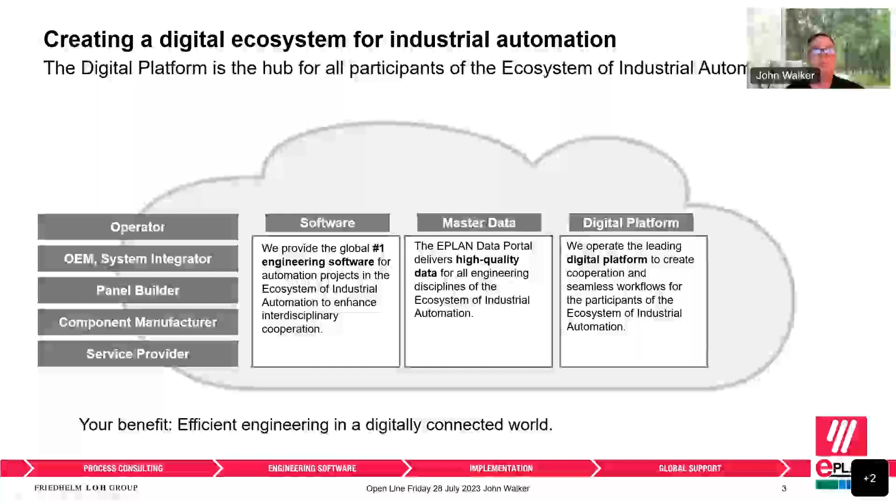I work for the Master Data Group, which oversees the data portal. It's a repository for high quality data for all engineering disciplines of industrial automation—parts and pieces, cables, connectors, all types of data are housed in the data portal. That ties into the digital platform for you to use and create panels.

In the data portal, a supplier or vendor supplies us with basic master data—commercial data, part numbers, dimensions. We ask for a 3D file, we get documentation with a link to the company's documentation for the component, and we also create a macro to use in our P8 product for single line drawings. Users are then able to create a schematic with that.

In ProPanel, they can create a digital twin or 3D representation of the cabinet, then generate a parts list and production data. We'll go into a bit more detail on that in just a second.

So several years ago, two or three years ago—Ian will have to correct me, it was before my time—I think about 2 or 3 years ago, we came up with the EPLAN Data Standard.

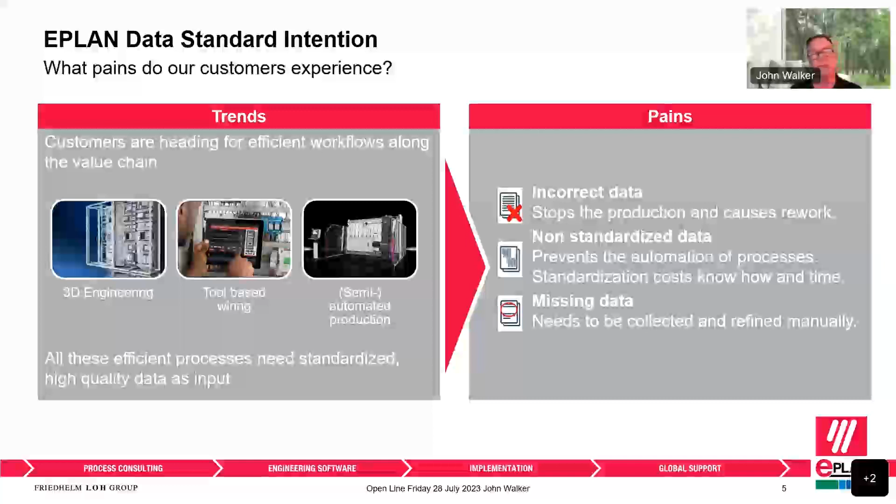There were varying degrees of data or levels of data available on the portal. With the data standard, we tried to standardize things to have 3D engineering tool-based wiring, so you could use Smart Wiring, which could export to a wire termination machine, and also enable semi-automated production, so you could export your panel design to a machine like Perforex to cut the holes in the panels.

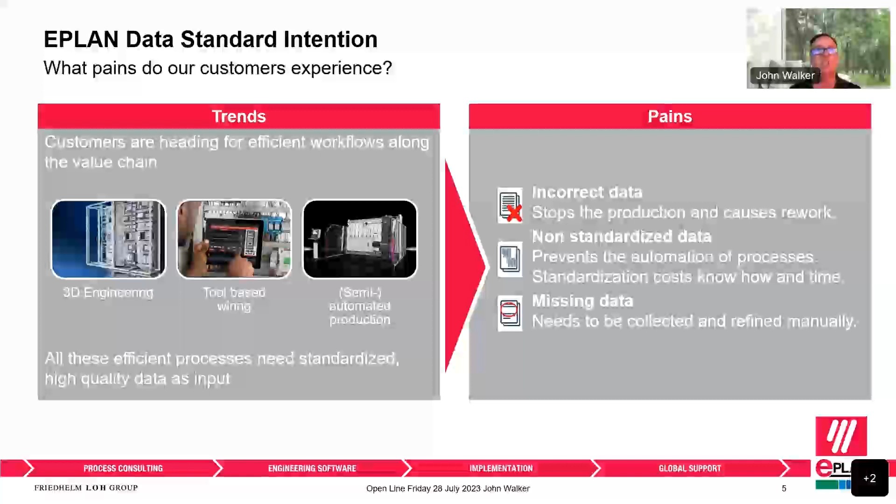Some of the pains our customers were experiencing were incorrect or non-standardized data, and missing data on components that didn't have complete data.

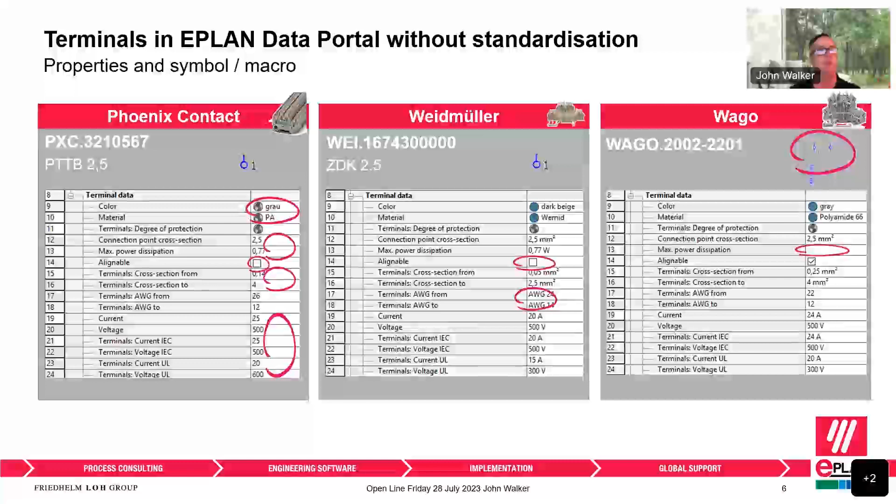Just a couple of examples on some terminals here—Phoenix Contact, Weidmuller, and Wago. There were missing values; for example, the Phoenix Contact, and two of the three actually, were not alignable, so you couldn't snap them in place when building your cabinet. By using the data standard, we went back and got all those missing pieces of data filled in, bringing those parts up to the data standard.

The data standard includes basic master data, functional templates, 3D graphic data, drilling patterns, connection point patterns, and logic macros—it just cleans up the data, I guess is the best way to put it.

Now in the data portal, Josh was talking a minute ago about how much it's grown. There's over 1.4 million components now included in the data portal. Of those components, we've got 870,000 that are EDS compliant parts. The goal is to have all of them EDS compliant. We're working towards that, but having over half, 60% EDS compliant, is a big help because you don't have to go search for data and try to make corrections.

So what does that mean? What is EDS? You say it's EDS compliant, tell me what that means. Ian, you want to help me out on that one? EPLAN Data Standard... try again, EPLAN Data Portal Standard.

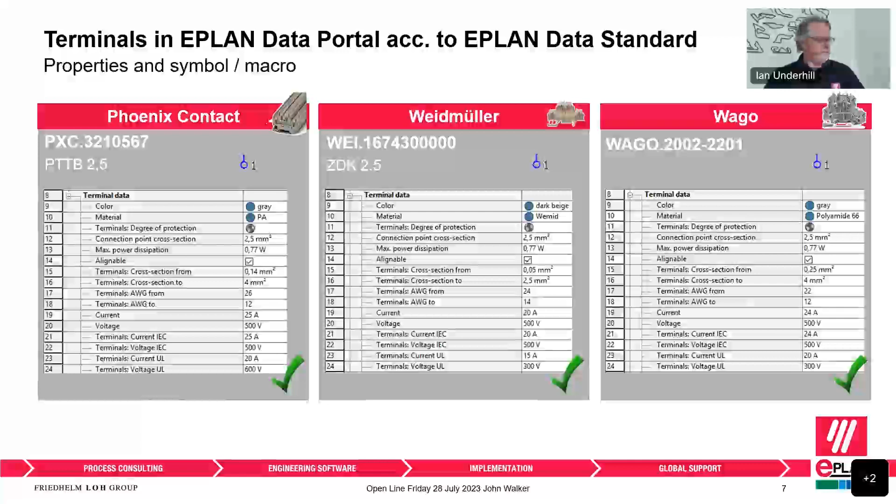Our users will know that for every component there are hundreds and hundreds of properties that could be associated with that component. Maybe simple ones from an electrical point of view might be its voltage - what voltage does it work on, what current does it have. For a terminal, there's specific data like this. Now, if you've got a power supply, these values don't apply. There's a different set. So the data portal standard is separated by the types of components, and for a particular type, like a terminal, we demand that as a minimum this data is complete.

So that would be obvious ones for all components - the description, for example, the manufacturer, the part number, and what have you. But for terminals, there'd be specific information that relates to being a terminal - is it an alignable accessory, for example. If it's a relay, then maybe the coil voltage is a demanded standard. So this standard looks at making sure that the appropriate data for the part is included. That's a concise enough description.

Does that help, Josh? Yeah, absolutely. There's a lot of times we start talking about abbreviations for things and we don't exactly explain what they are, so that's part of what I do. I said it once and then it went straight to EDS. I'm a guy that's in a customer journey, kind of marketing role, so for me, I have to understand what this is before I convey it. I think that's important for us, because we start rolling with things, and then I've been in situations where I'm like, yeah, I understand what that means, and then 5 or 6 months down the road I'm like, I don't think I ever got a definition of what that actually is.

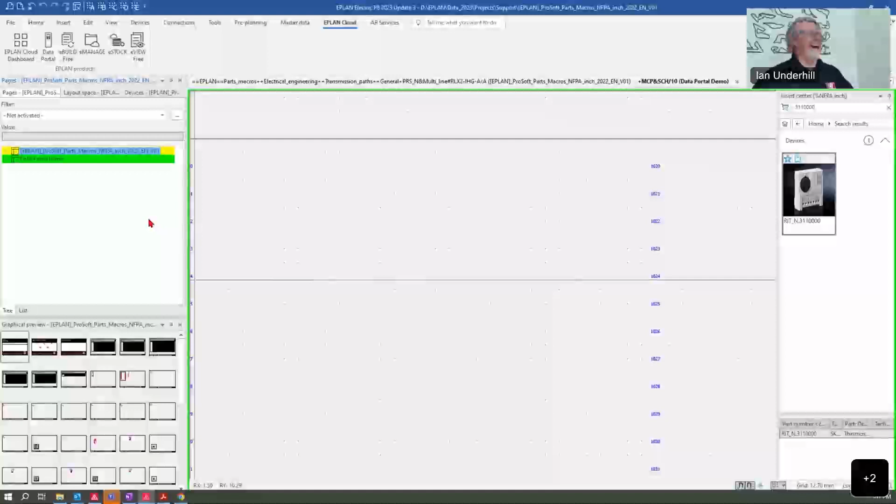Okay, so let's talk about the data portal specifically. From within EPLAN, we access the data portal from the EPLAN cloud menu. This is the default home menu when you start EPLAN. You go to the EPLAN cloud, and the data portal you can see as part of the EPLAN cloud. You can access it by just going straight to the cloud, and it will open the window like a browser window within EPLAN.

You can see you've got access to the various different parts of the EPLAN cloud. The data portal is here specifically. You can also access it directly from the menu by clicking the data portal. Either way, you end up at the same place.

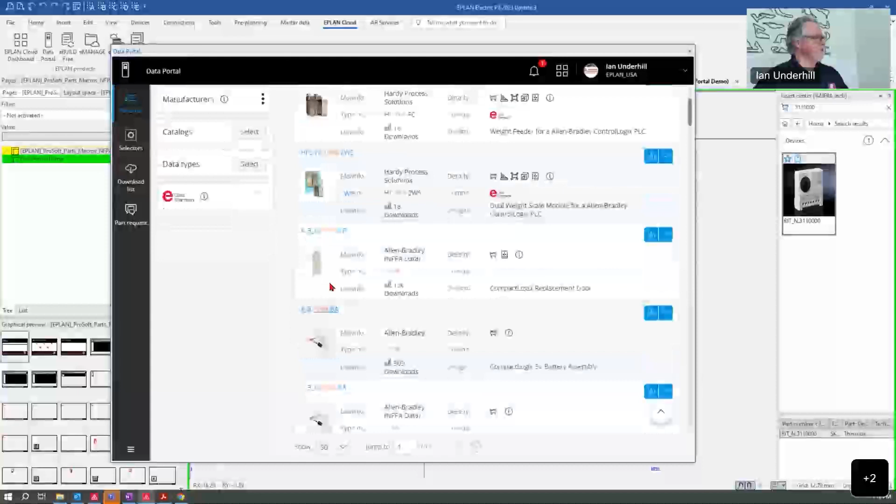The key thing about the data portal is it's a little bit like going shopping on Amazon - you need to have an idea what it is you're looking for, and there are a number of different ways of getting to the data. The most obvious way, if you know the part number, you might just be able to type the part number in. So as an example, 1769 would be Rockwell. You see 1769 is used a lot, but as I scroll down, we can see the Allen Bradley parts, or Rockwell, because 1769 is their CompactLogix, the device type for the CompactLogix. So I can search for a type number like that.

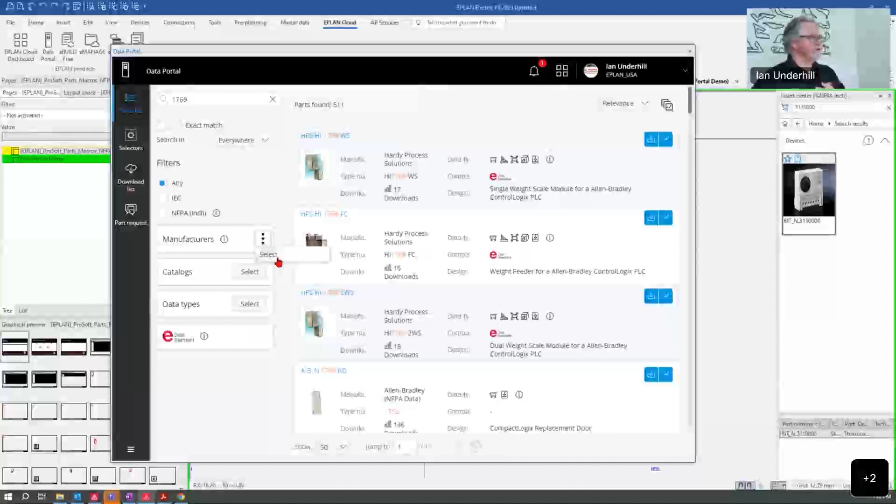I can narrow it down by selecting a particular manufacturer. So given I've searched for the number, here's all the manufacturers out of the list of 400-whatever that have a part with the number 1769 as part of their part number.

We were looking for Allen Bradley information. When you're looking at these manufacturers, you'll see in some cases the manufacturer, as in this case here, Allen Bradley, has got two entries. Typically, although not exclusively, it's going to be the one that has a multicolored icon. So we can see the Rockwell Automation in that red color - this is going to be IEC data, so that's going to be millimeter-based data.

And then we're going to see this other data, and you can see it says Allen Bradley NFPA data. The important thing to remember is that it's not just NFPA data, it's inch-based data. So if you're working with NFPA but in a millimeter environment, this is not what you want to download. You want to stick with the IEC data and then just rotate and flip any macros you have to make them work for you.

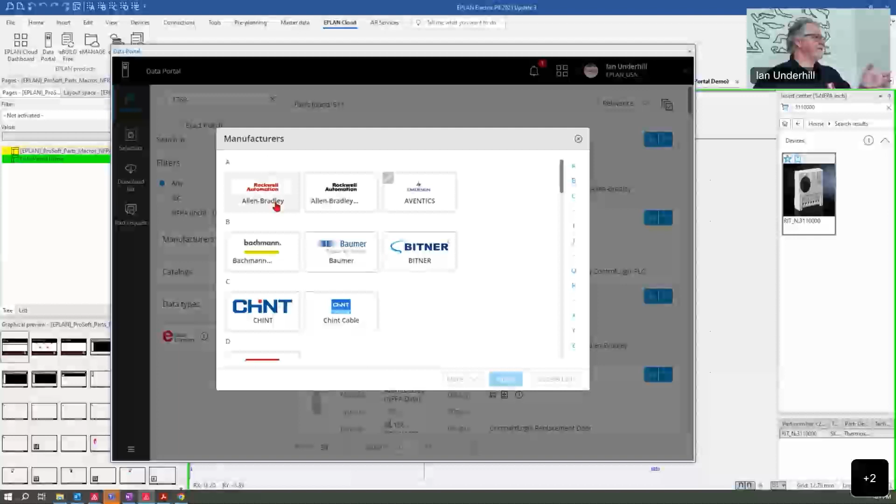This particular project I've got is an inch-based project, so I'm going to select on this and select apply - you can pick multiple out of all these manufacturers that have a part with that value in. So I selected apply, and now it narrows down that list for anything with 1769-dash in the part number and Allen Bradley NFPA data specifically.

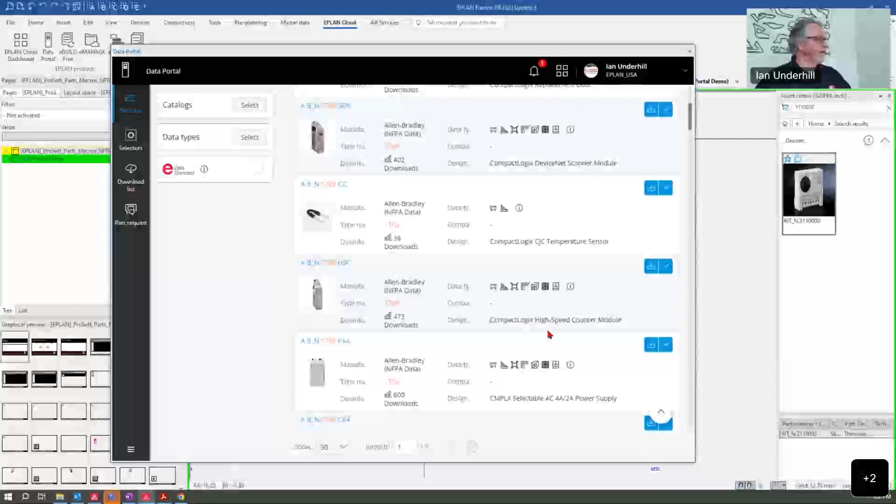So if I have a look at one of the pieces of data, I'm going to pick this card here. I want to pick a high-speed counter - that may be a useful one. So if I select the particular part, we can see here what we would call the commercial data.

So the manufacturer information, the type number, the order number, and a brief description of what it is. Unfortunately, Rockwell in this instance only have the description in English. Many manufacturers will cover all 19 languages.

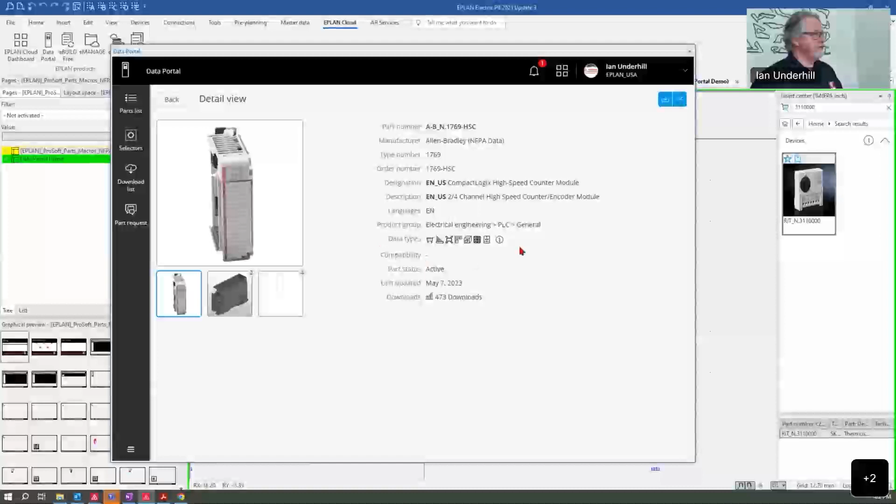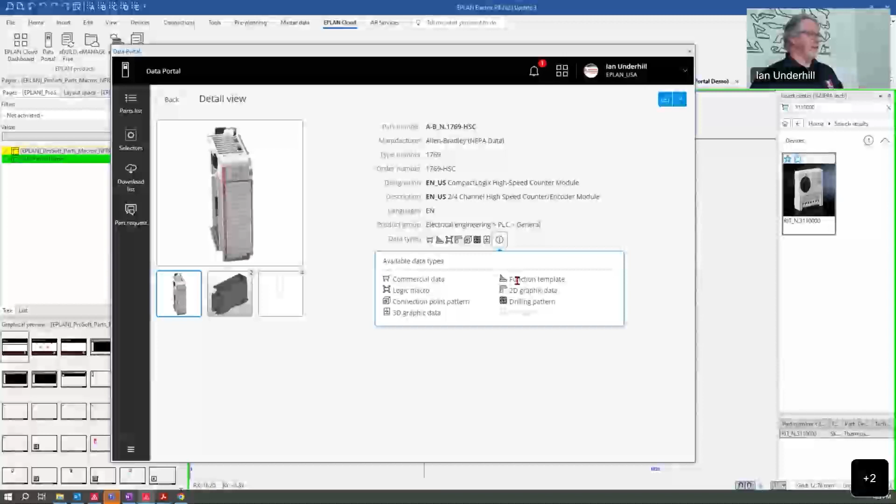We also see the other data types that are available, and if you're not familiar with these icons, if you click on the little information icon at the end, it tells you. So we've got commercial data, we've got a logic macro so we can place it in our schematics, and we have a function template that describes the functionality of the device in terms of what connection points it has - what connection point is the power, the communications, whatever it might be.

We have a 2D graphic, which means if you're still using just Electric P8 and doing 2D style layouts, then you've got data for that. But preferably you're going to be using ProPanel, in which case you have the 3D graphic data here - that's the 3D model. As you can see, this one goes in the backplate layout in ProPanel, and to go with that you have a drilling pattern, so we know how to physically mount it onto the panel and what holes it needs.

So when you pass it to a Perforex, the hole can be cut, or you can do a drilling pattern output, and the technician knows what size holes to drill and where to drill them in your panel. Then there's the connection point pattern, where in three-dimensional space the connections come out of this device, so we can route the wires in ProPanel.

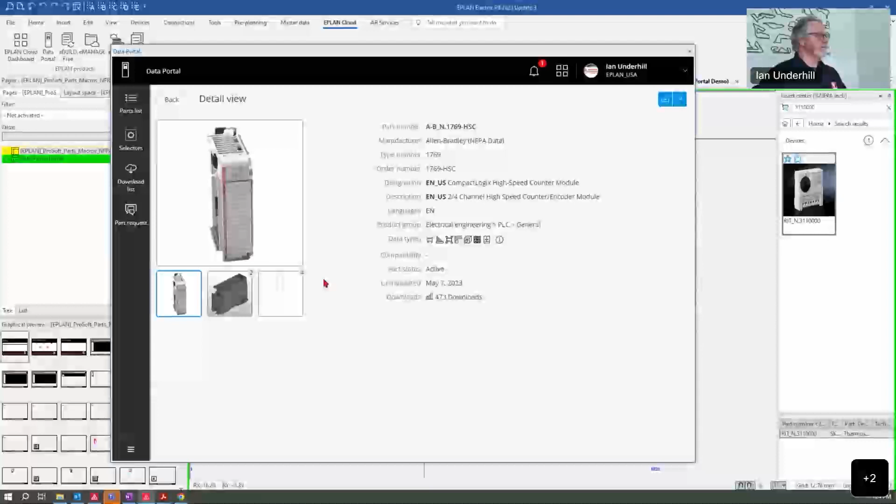So that's what's available with this particular one - how many downloads, stuff like that. If we want to actually look at the macros, we can click on here, and we see in the macro we've got a multi-line variant and an overview.

We've got two different styles of overview. Typically, if you see a variant E, that's the type of graphical overview you'd use when trying to display a PLC rack, for example. If you're doing the import from Architecture Builder from Rockwell, it would place the variant E in your overview page to show your rack layout. Then we've also got the part placement for the 2D, so that's what data is available.

We can choose to download the part directly, or we can add it to a download list. That's why I'd liken it to shopping at Amazon - you can add it to your download list, and it's going to add it into the list here.

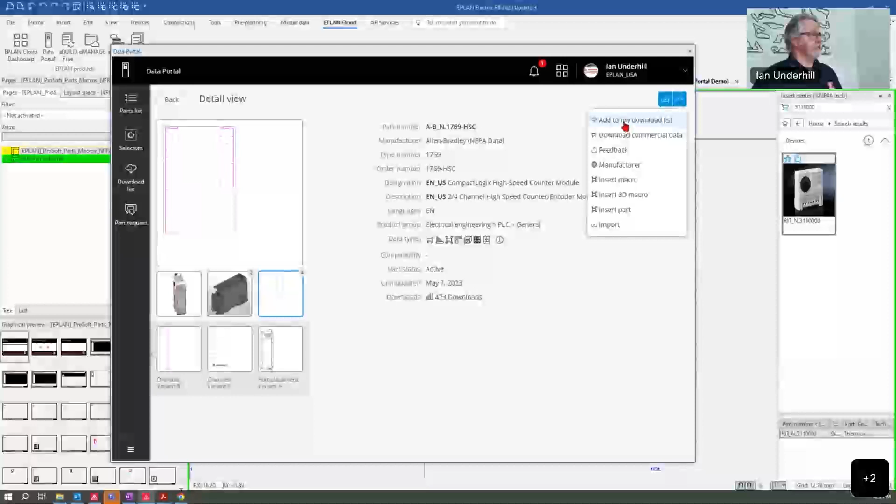So I'm just going to select that, and we see it's added to the download list, and over here the download list now has one item in it. You can continue shopping like that. When you're ready, you can go to your download list - I'll just do this one, select it and import it.

If this was a device such as a contactor or a relay or something where there might be accessories, or even a PLC item where there's a separate terminal block that you need to use with an electronic module, then maybe you might get an accessory list. This item is a standalone, so there's no accessory list.

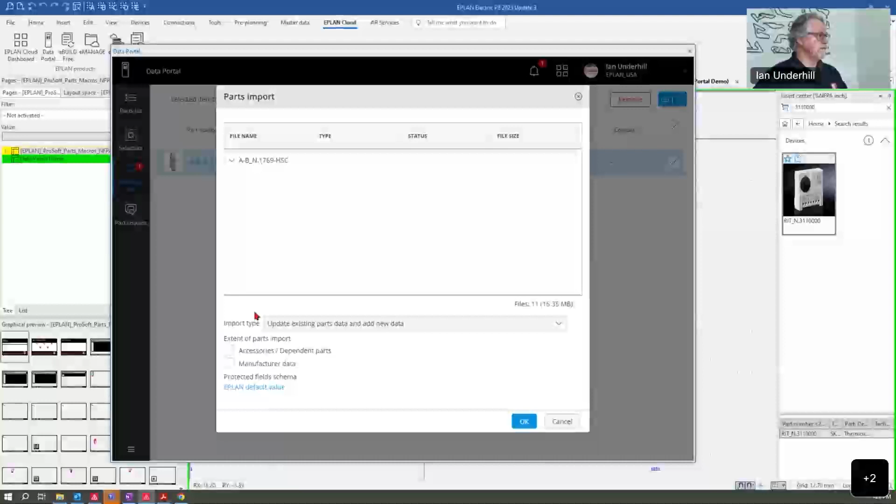You can also download the manufacturer's data - that would be the phone number, address, and information about the manufacturer themselves. I don't need to, I've already got that data, so I'm going to leave those two blank, and I can just select OK.

It does the download, as you can see here, reasonably speedy - obviously that's dependent on your internet connection. Once the files are downloaded, I select import. That last part, having downloaded the files, is adding that part information to my parts database ready for me to use. Once I've downloaded them, I need to empty my shopping cart, so I'm going to remove all the items from my shopping cart.

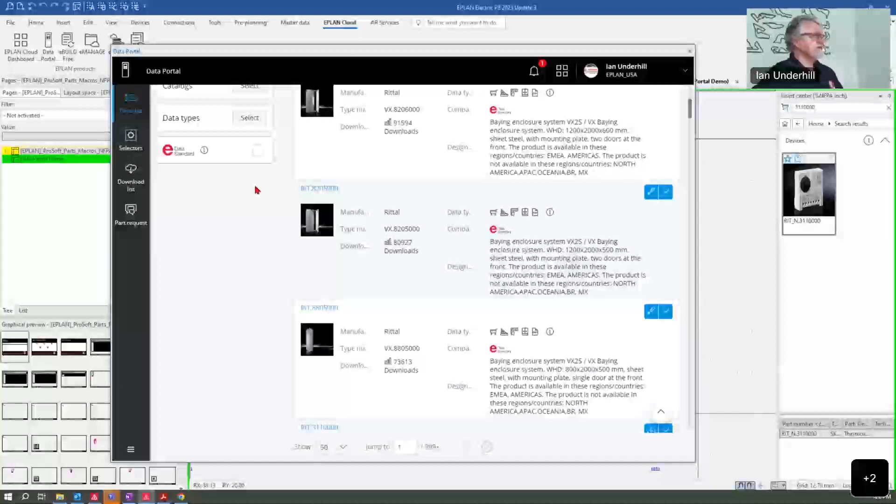So that's one way of looking for data. Let me ask you this real quick, Ian.

So it showed that it had been downloaded 473 times - well, after you just did that, it was 474 times. Why is that download history important? The first thing on your screen right now from Rittal, it looks like it's been downloaded over almost 110,000 times. Why is that important, or is it just to give historical data of the part? I think mainly it's for historical data.

I would argue that perhaps it does tell you if something's not been downloaded very often, it's not used quite so much. Obviously, with the allowance that some of these things are quite regional. Rockwell is a massive player in the North American market, but maybe less so in, say, Germany or China. Actually, China doesn't count, I don't believe, because they have a separate data portal due to the Great Wall of China internet thing. But yeah, it may be related to that. But yes, it's mainly historic data.

So that's one way of... I think John was trying to say something, but he's muted. Sorry, I was muted there.

It does allow us to give feedback to our vendors - here's the most downloaded parts. So they get some information on what region they're downloading. We can't tell them who downloads it, but we can tell them this many were downloaded in the US, this many were downloaded in Europe, different regions such as that. I didn't know that, so that's cool.

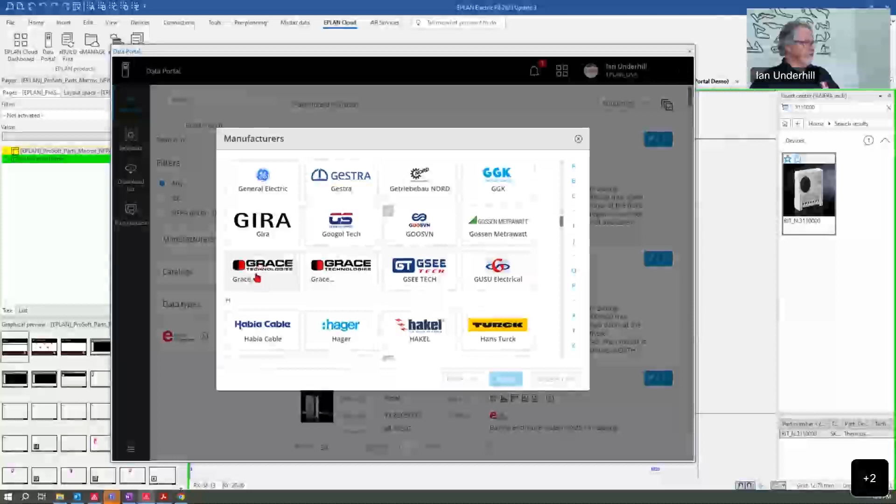So yeah, that's one way of looking for parts. You may want to browse a specific manufacturer to look for parts, and again, I can go and select. Now, because I've got no part number, I'm looking at all the manufacturers available to me, so I can scroll down and you'll see, for example, Grace Technologies - they have both IEC style and NFPA inch data.

And lots and lots of different manufacturers, as you can see. Again, I'll stress that if you're using millimeters, avoid downloading the NFPA data, because that's inches and it's not going to work very well for you. You should download the IEC data and manipulate the macro to make it look as you require. You can filter that too. It looks like that if you exit out of the manufacturers. You can just do IEC or NFPA like that, so that you don't make that mistake.

Yep, that definitely is a big help. I'll jump in here, Ian. You've brought up the IEC versus NFPA data a couple of times. We've had a big push from US customers requesting NFPA data, so we're working with our vendors to get their data, since for years it had just been IEC data. So now we're getting them converted over to NFPA data. We've got an initiative to bring in new NFPA data, and that's something Ian's going to show you on the sample data a little bit later.

Yeah, I keep stressing it, John, and it's important. It's inch data, that's the key. We call it NFPA data because it's in that style, but it's inch data, and it's really important for people that maybe they're using fluids as well. Typically all the fluid equipment is all millimeter based. Generally the rest of the world is millimeter based.

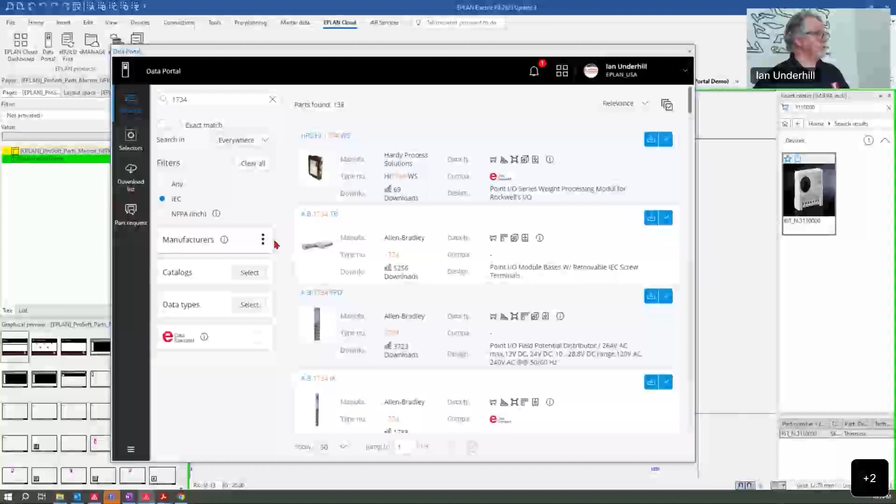Anyway, so yeah, once we pick on a device, as John said, I'll use 1734 as an example. So we've got 1734, we've got a mix. I can pick to have any. I've got all sorts of things I can pick. IEC only should filter out the NFPA ones, and NFPA only should filter out the IEC ones.

Hey Ian, go back to any, if you don't mind, just for a second. How do you know if it meets the EPLAN Data Standard, or EDS as I called it earlier?

Yep, that's a good point, because it has that there. Oh, a fancy logo. Fancy logo, EPLAN Data Standard. As you see, Rockwell haven't caught up yet.

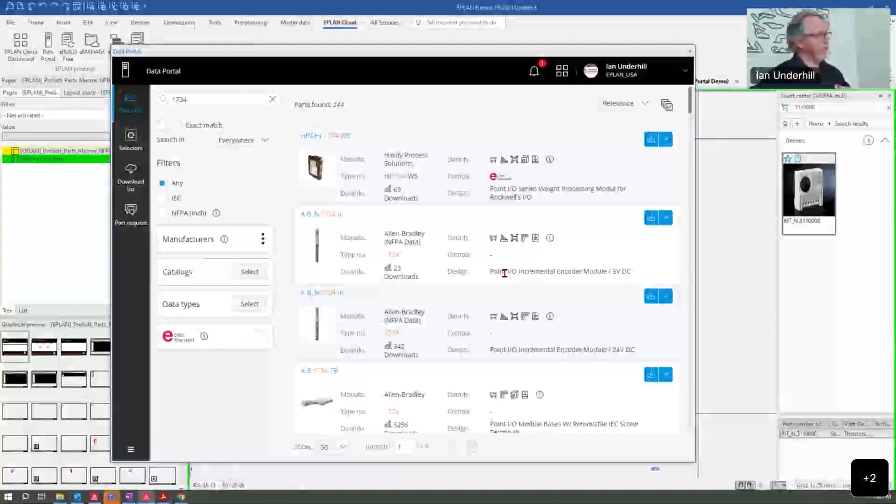Unfortunately, they're not, but they are working on it. I can tell they're working on it. And the fact that it's not there doesn't necessarily mean the data is bad. I wouldn't think of it that way. It's just that it hasn't been tested against the standard. That's correct. Chances are, certainly from a PLC standpoint, the Rockwell macros are very good, and the data is very good, I should say. We're all artists, so we all can criticize the way the macro looks, because we all want it to look our own particular way. But the data is generally very good from that respect.

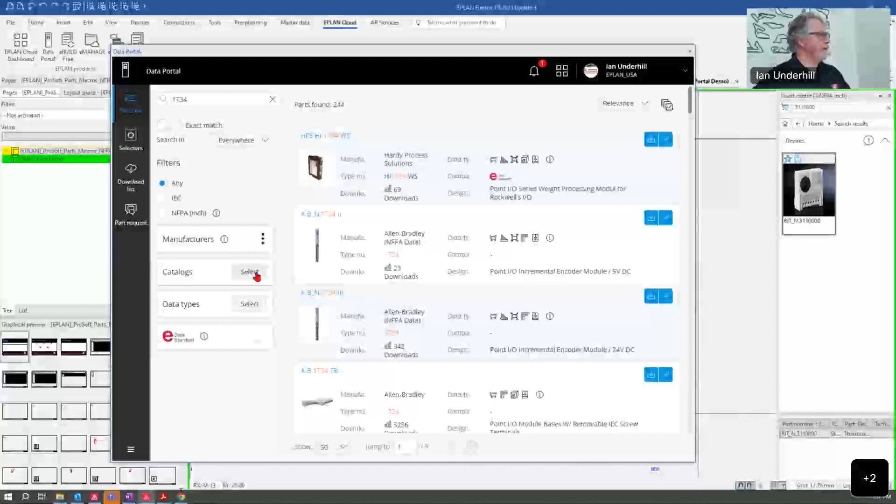So yeah, that's how you can search. Another way would be to actually use their catalogs. So I'm going to get rid of this, looking at everything now. And this is the classification. So we can use the E-class classification. E-class is a standard that originates out of Europe, and it's been adopted by a massive amount of manufacturers. You can use four codes to classify pretty much anything from a push button to an automobile.

This organization has the classifications, and using four different numbered codes, you can use that. If you've got E-class data for a component, and EPLAN supplies the E-class data and a step file, we can create the data portal data just from that data. That's how in-depth that E-class thing is.

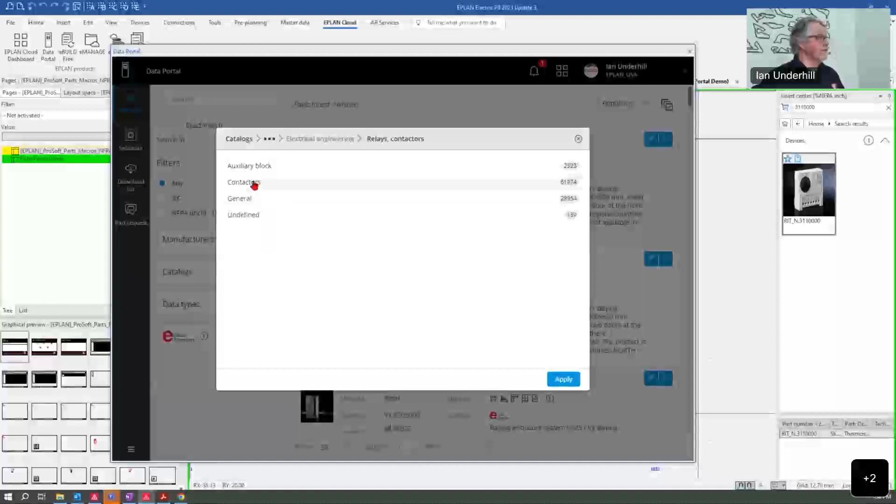I'm going to look at the EPLAN product groups because it's going to be more familiar to most people over here. So we can look at the product groups, and when you're looking in your parts database, you'll recognize the same categories. Electrical engineering - are we looking for heaters, inductors, miscellaneous devices, motors, whatever the devices might be. I'm going to look for relays and contactors as an example. I'm going to look at contactors, across all the manufacturers who make contactors. So there's 62,000. Now I can see them from Siemens, from SE which would be Schneider Electric, and from all sorts of different manufacturers. So I can search through, and there's 999 plus pages to jump through.

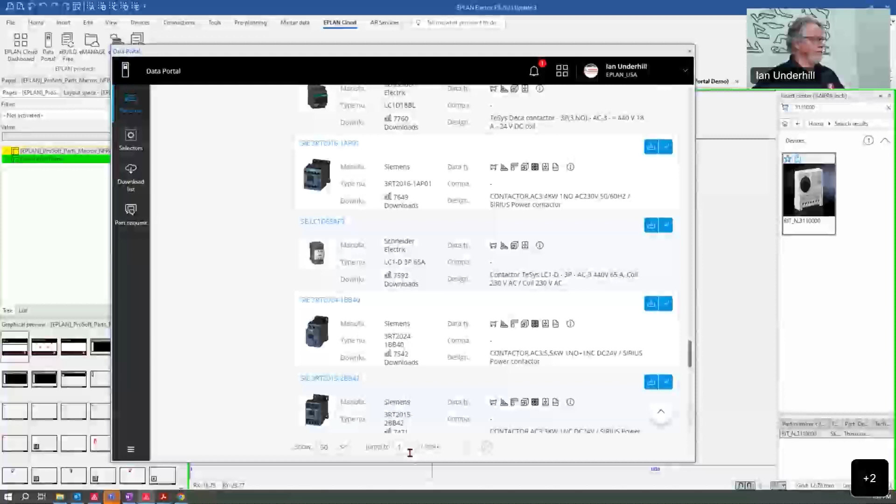So I can then go shopping for contactors on that basis. And then I could also say, well, who does NFPA data for those contactors? So here you see it's not changed because it doesn't matter - it's a contactor, it doesn't come with a macro, it just comes with function information.

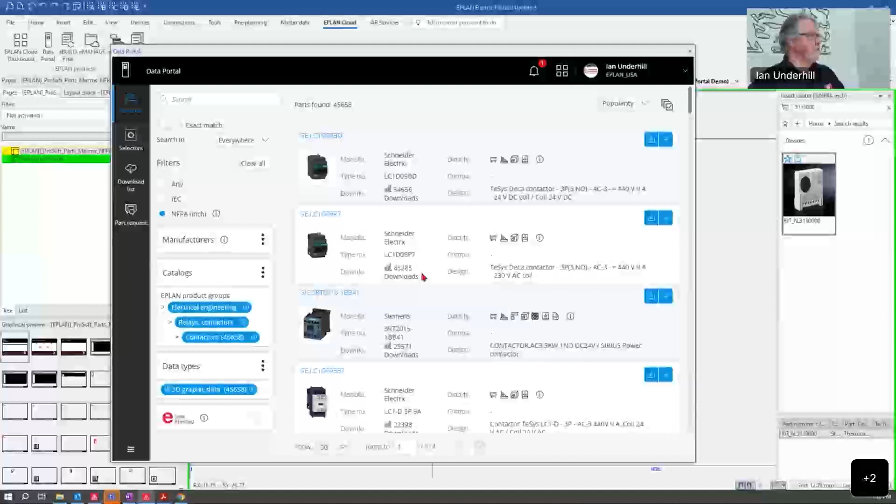And then I can also filter. It's important for me that I have 3D graphic data. So who does that? Using these different filters, using the manufacturers and catalog information, you can help narrow down what you want.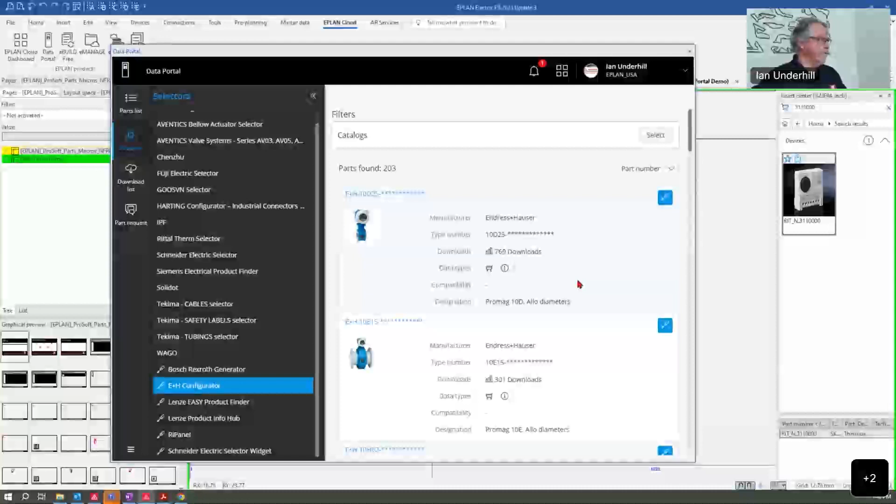Endress+Hauser is a manufacturer of meters, flow devices primarily - measurement units that will measure the flow in a pipe. You can see most of these items clamp onto different styles of pipe.

If you're picking a particular style, there's a basic series, and you can pick if this is the series of device you want. You go to the screwdriver icon, and it tells me we're going to go somewhere else to look at this data.

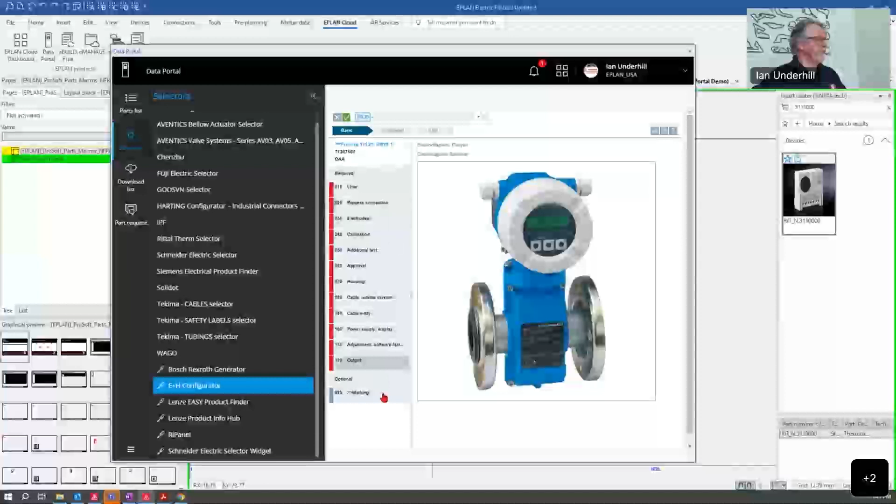And it takes me to the Endress+Hauser configuration page. So there's a big view - this is an electromagnetic flow meter. I then get to fill the part number in by deciding the different properties of this, so the liner of the pipe - it's going to be PTFE - and that gives me the Q code.

Then I go to the process connector - what style of connector is it - and I just randomly pick in there. And that's not something we've built. That's something where we're just connected to the Endress+Hauser configurator on their website.

I believe in many cases it's a collaboration - the link there is joint work between them, because they know their components, and EPLAN provides that link. But this is actually their configurator, it's not ours, yet it interacts with our data to provide the right information.

You can go through the whole thing, and once you've filled out all the different parts, you can download that specific part. So whenever you do it like this, it's not necessarily going to have that EPLAN data portal certification when you're looking at it in the data portal, because you're having to go in here and configure it from there.

I'll be honest, I didn't notice, but you may be right. Let's see - if I click on it. Because if you're having to configure it, there's nothing to really give a certification from, since you're configuring it yourself.

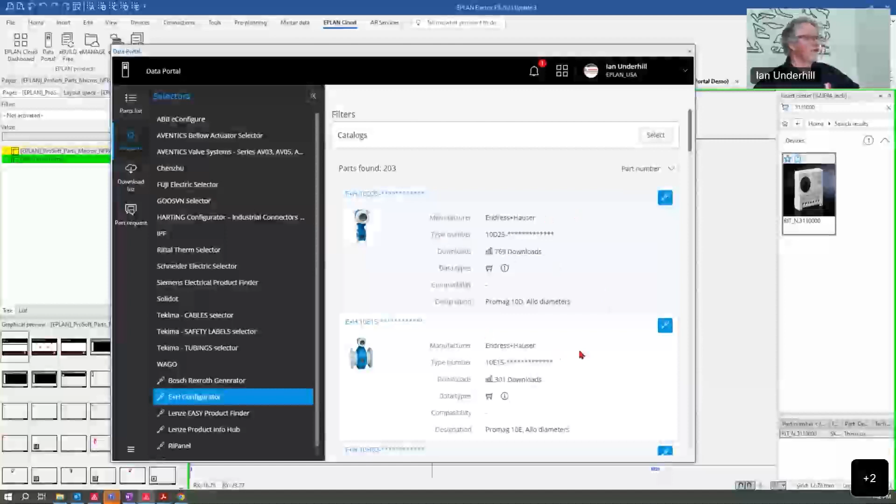Let's go back and just go to those selectors. This isn't the only company that does this either - we have other configurators. That's Schneider Electric, for example, again takes you direct to the Schneider plant.

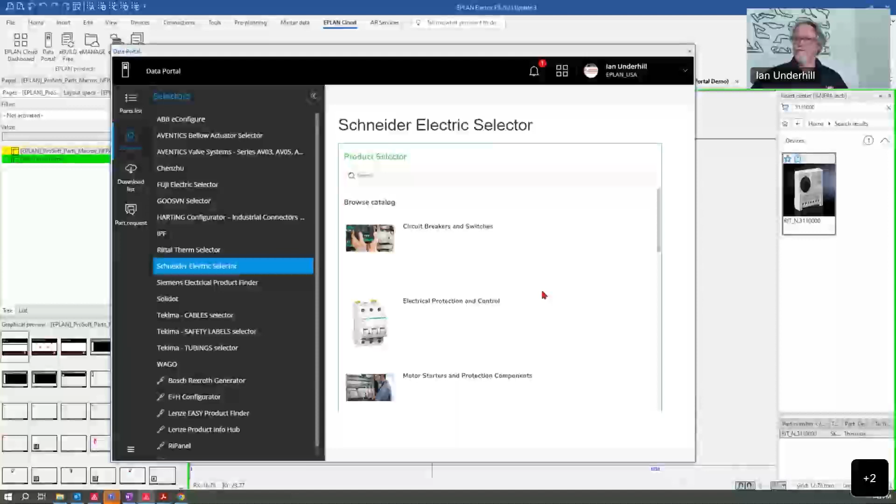One of the companies, Festo for example, you can do it actually direct through their website, and they've got tools - they don't send you a part, they'll send you a whole project based on the configuration of a valve pack. So loads of different tools to configure things. The RiPanel one allows you to pick a panel and actually put cutouts in before you build it.

So I won't carry on with that too much, just so we've got time to get to the other stuff, because we've been talking away way too long. Well, it's great information though. Yeah, oh yeah, it really is.

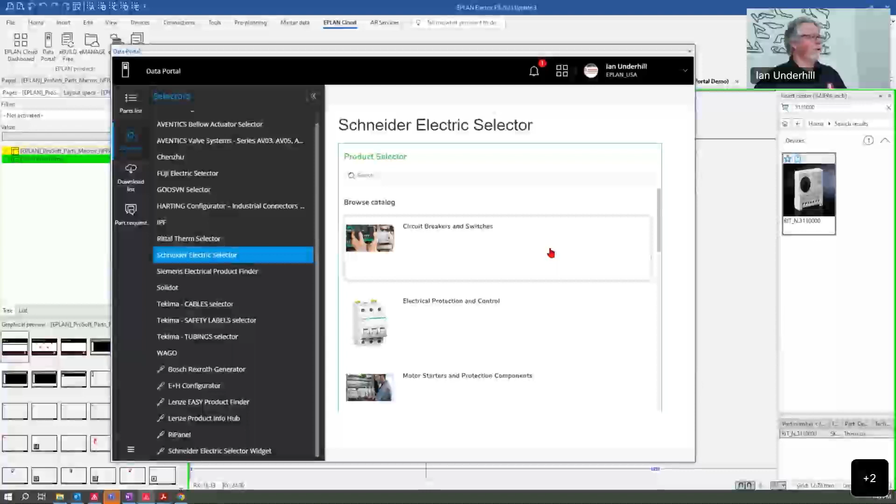For sure. So I want to just show you when you download a part, as an example - I picked a Rittal part to show what that brings you. I downloaded a Rittal part earlier, and this is the part. It's a thermostat that would be inside your cabinet to control a fan or a cooler, or maybe a heater if you've got to keep the cabinet warm rather than cold.

I found it in my insert center, as we see here. It's actually in the actual parts database. I'm going to show you how you might then use it. Once it's in the parts database, it will appear in your insert center.

I actually searched for the part to make it easy to find. I could navigate - let's get rid of that - I can navigate through the devices, and we see those same categories: electrical engineering, component, and then here's the categories. Obviously, since I know what I want to look for, I can search for it directly.

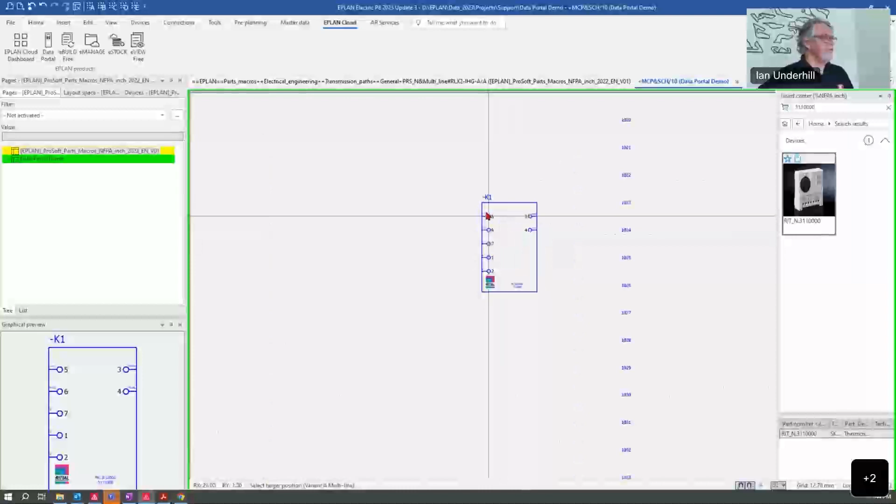This makes it much faster. If I drag the part in, this is an example of the macro that comes with it, showing the connection details. I'm just going to place it.

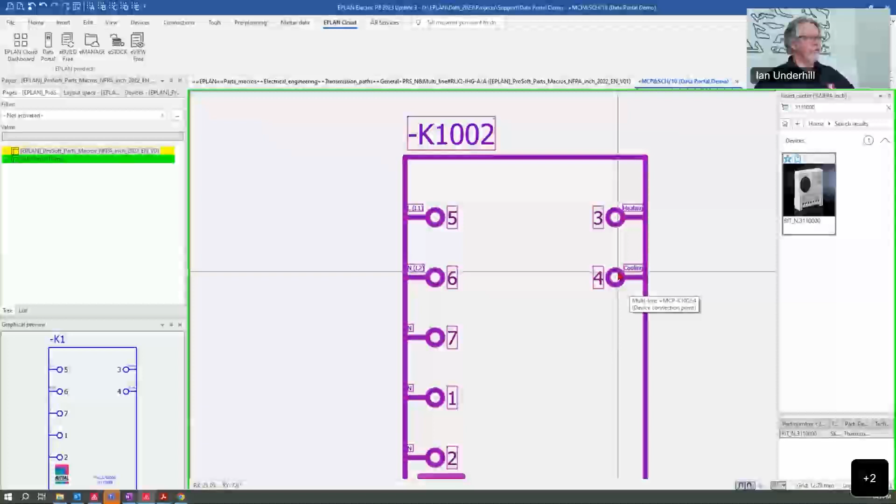So it identifies the connection points, the live and the neutral connection points for this device. These are probably not connected in this case. And is it going to be heating or cooling, depending on how you want it? If the temperature is above the value set on the dial, the cooling will come on. If it's below the amount set, then the heating will come on. So that's how this works.

We talked about the additional files that it comes with, image files and macros and that. So there's an example. When I go to my part, there's the image file, so I've got a picture of what it looks like. But then I've also got data that gets downloaded.

Some companies actually will give you a PDF of a data sheet, or other companies may give you a hyperlink to the data sheet on their website. Rittal is one of those companies that does that. So if I right click here, I can look at the open hyperlink. I see I can open the image file, but I can also look, as you see, Rittal covers looks to be close to 19 languages. I'm not going to count them, but from English, Turkish, Russian, all sorts of different languages you can see here.

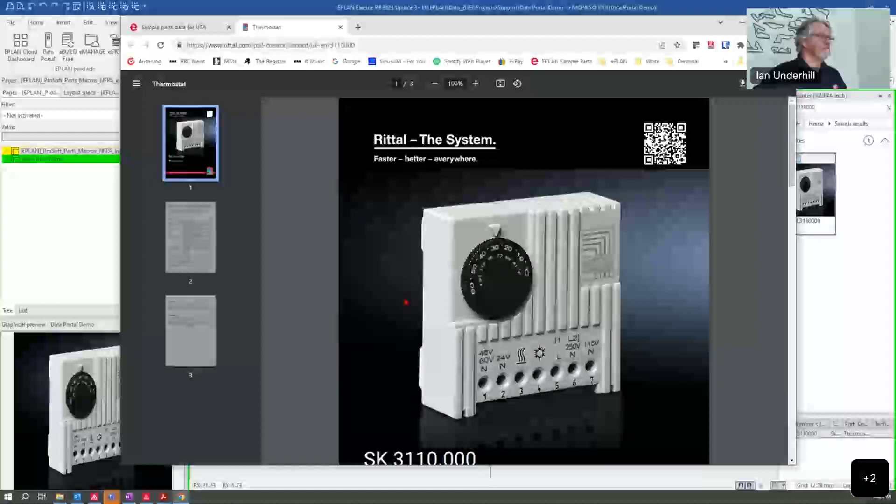I'm going to obviously pick the English one. So I click on the data sheet here. It takes me straight to the Rittal site, and here's the data sheet for that particular device. So that's something you could download if you wanted to give it to your customer, or you can actually, if you do bill of materials, you can include that hyperlink in your bill of materials, so your customer can go and access the cut sheet or the data sheet for that device. So that's the sort of data that's available.

So we talked about standard data from the data portal. John also mentioned that there's been an initiative working primarily, I believe, with some of the distributors that we work with, to give us a list of components they believe their customers use a lot. So they obviously have data about who buys what, and we use that data as a company to generate some inch-based, NFPA-based data, for companies that are not necessarily on the data portal. Companies we are working with are trying to get them interested to come on the data portal, or John is, but companies that are not currently there, but we get a lot of requests through the distributors.

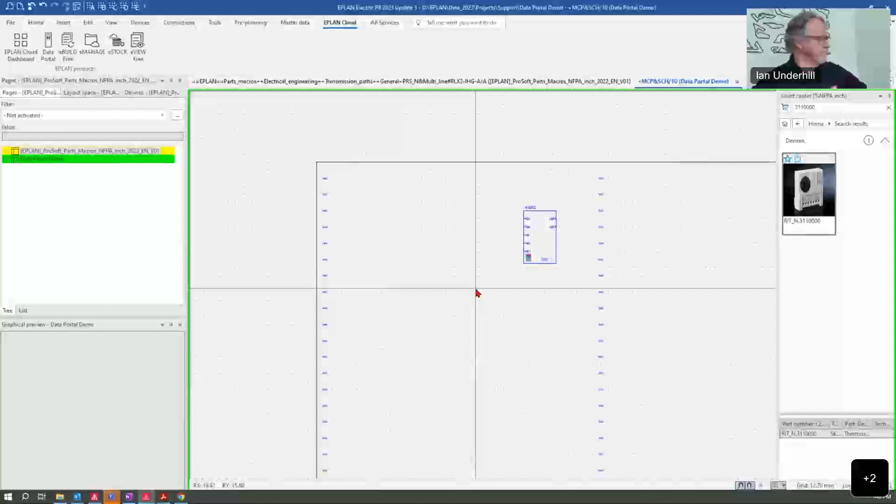And just to add to that, Ian, we are pulling some data from existing vendors that we have in the portal. It's just parts that our distributors are selling that are not currently available, or it's maybe parts that EPLAN customers have told the distributor, hey, we need to get this part. So some of the parts we're creating are with existing vendors.

Okay, so how long does it take to get that part data in, though? From the time of the contact that you have, to the time that it comes into the data portal, and then whenever you check the standards, what's that turnaround time look like? Well, to be honest, it varies at the moment. It's a pilot program at the moment. We've just released the data about 2 weeks ago, the first set of data. We're working through it, so stay tuned. I can give you a better answer maybe in a few months.

The thing that Ian's about to show you is the sample data. And every registered EPLAN user should have received an email from EPLAN a week or so ago, provided that they said we were able to contact them. You can opt out of that when you first sign up. But every user that said we could contact them got an email with a link to this site that Ian's going to show you. And we're really asking for feedback, so if you like it, if you don't like it, let us know both.

These are data points that may not have everything that needs to be in the EPLAN Data Standard yet, but some of them do. This has just been pulled from publicly available information. So our EPLAN team is going in and looking on the company website and pulling data. If they can get a 3D drawing, they've got that. So varying levels of data, but it's exciting to have this start, and it allows us to go back to existing vendors and new, potential vendors, to convince them that there are customers looking for their data.

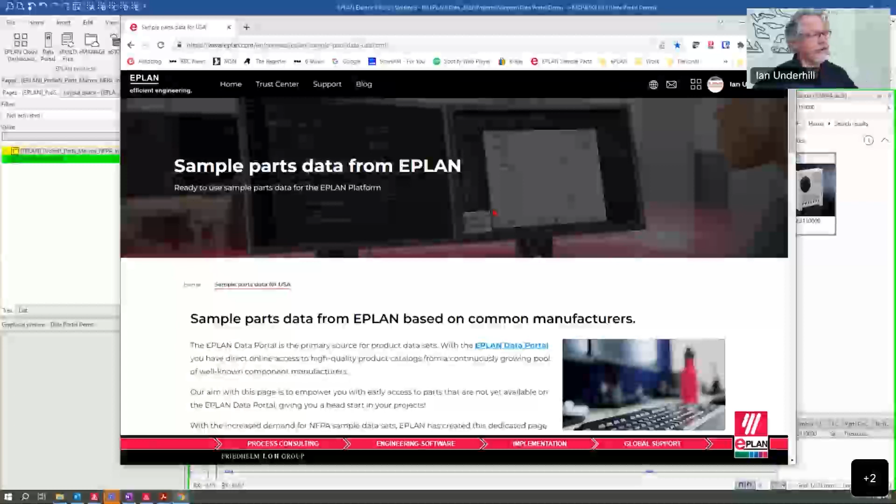This particular one, though, there's a particular link that you need to be sent. You can't find it direct from the eCloud, or from EPLANUSA.com or EPLAN.com. You need this particular link to allow you to get there. There's no link within the EPLAN.com website to navigate to it. So this is very specific.

As I said a minute ago, there was an email sent. If you did not get that, or if you've signed up since then, ask your EPLAN salesperson and they can get you a link to it. I think I can magically put on YouTube what that link might be. That'd be excellent, I can get that to you. Absolutely, yeah. So thanks, I'll... carry on, Ian, sorry about that.

Once you have that link, I've actually stored it as a shortcut here on my bar. You go to this sample data for the USA, as it says here. It says the data portal is a primary source for product data sets. This is where the portal data is checked, data that's to the EDS standard. It's high quality access. However, to give you access to manufacturers, as John said, that aren't necessarily on the data portal yet, or maybe coming into the data portal, although we're working with it, we give you the ability to download the parts.

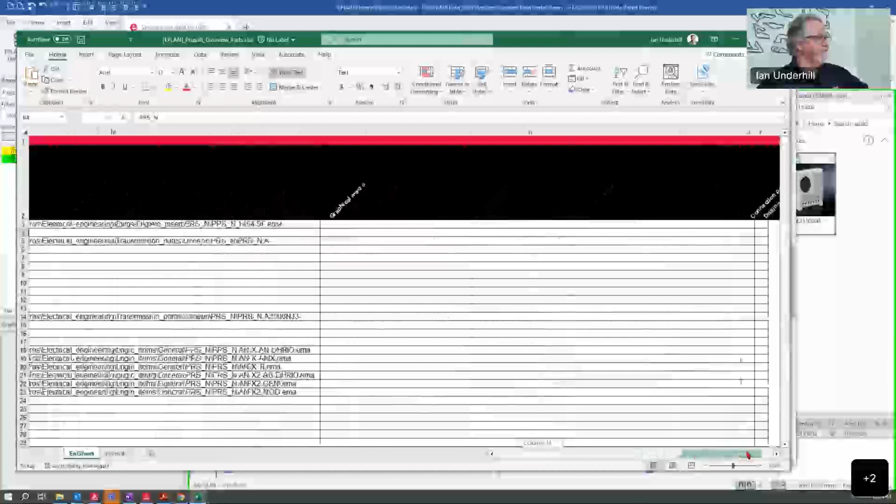You get an Excel file - of course, it's going to pop up on my other screen. This is actually an export from the EPLAN parts database once the data has been added in. So it lists information about the manufacturer, what the part is, the various different properties and what have you that are in there. So it's just a basic list, so you can have a quick look and see, is the part that I want covered by this?

You then also get an EDZ file. So for those of you that are not familiar, the EDZ file is an EPLAN Data Portal Zip - that's what it stands for.

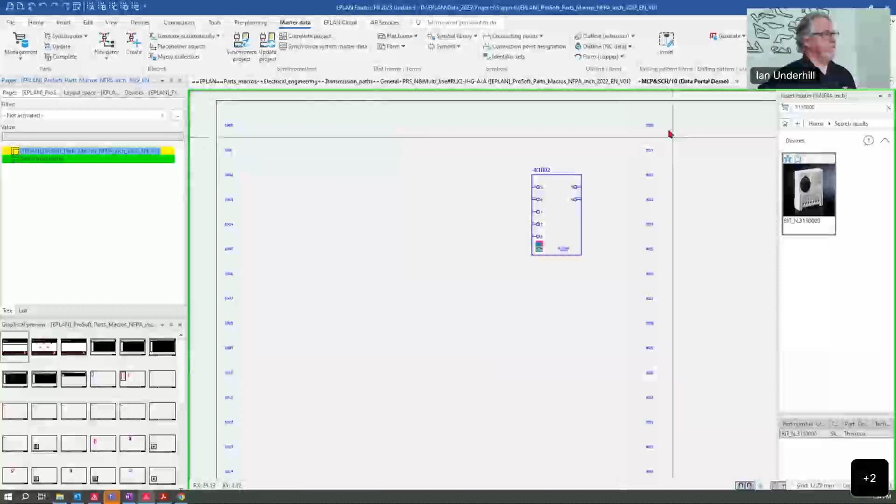And with that file, you go into the master data in your EPLAN, you'll go to the management of the parts - so here's my parts database. You'll go to extras and select import, and then you go and find that file, making sure that you pick the right format, the EDZ format. Go and find the file, and you should pick update existing records and add new ones. Chances are they're all going to be new ones, so the existing record is sort of incidental.

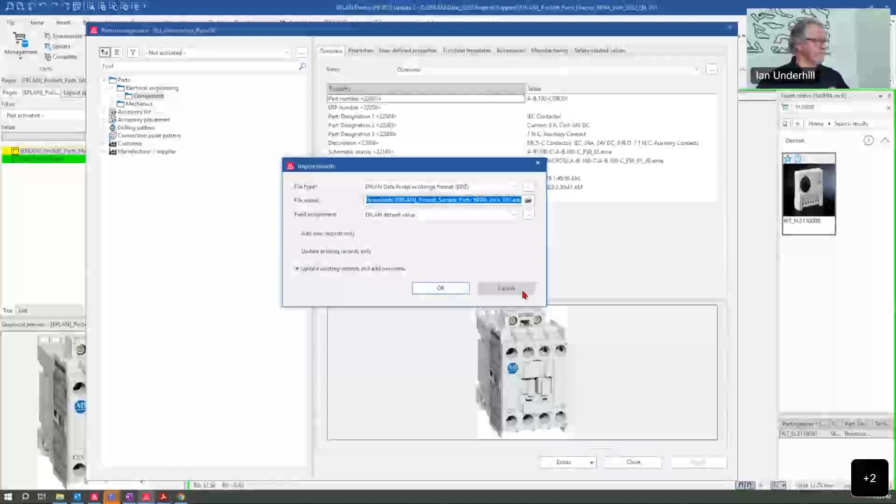So once you do that, it'll bring in, for the particular parts - which I've already done, so you don't have to wait - all the parts from that particular manufacturer that you've downloaded. So I can look at those, for example, and I think it was PRS. I'm going to search for the manufacturer's code, so we can see here the sort of data that's available. So we've got some prefabricated cables.

What's in general items, a wireless adapter of some description, logic items, units of various descriptions. Those familiar with ProSoft will recognize some of these. There's some PLC items - they make PLC cards to go with other manufacturers. For example, this is a card that would go on a Point I/O or a Control/CompactLogix, for example. This is a Modbus serial. You see, you've got a lot of the same data - we've got the image file, we've got macros that go with this device.

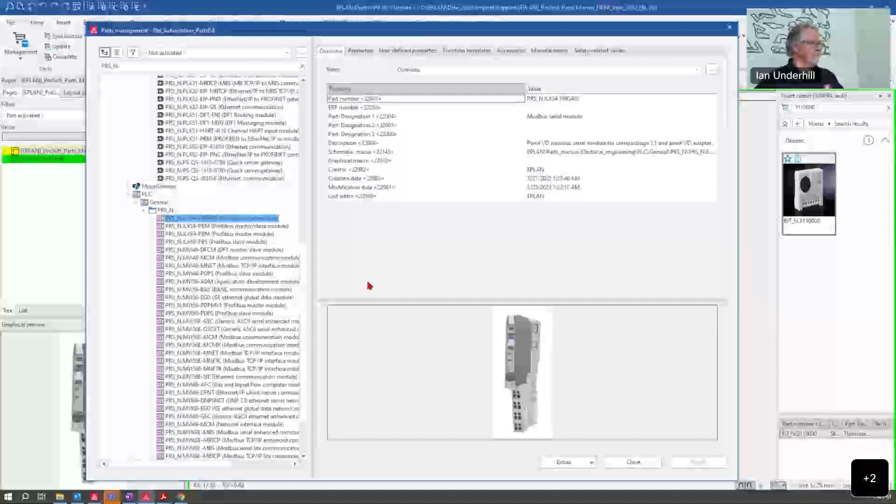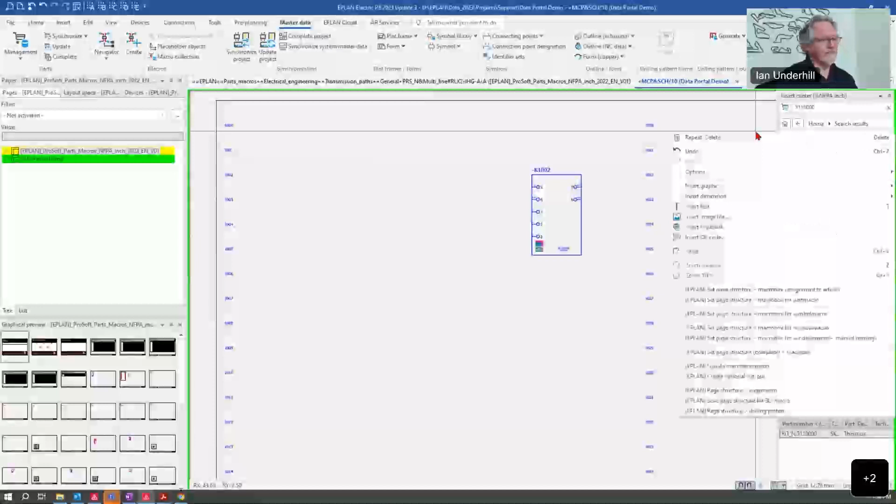Once you've imported the data, then you can go and search for the data. I could navigate through devices and go through the various items, or I could search for those from that particular manufacturer. We see the different items.

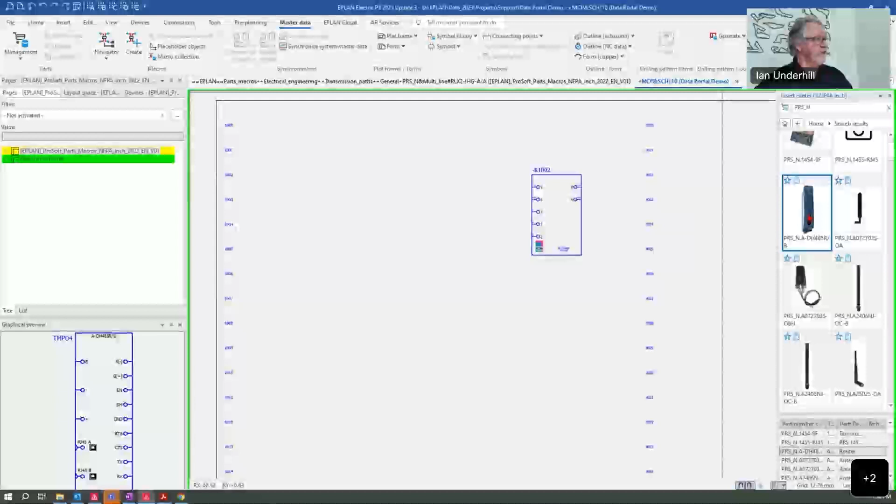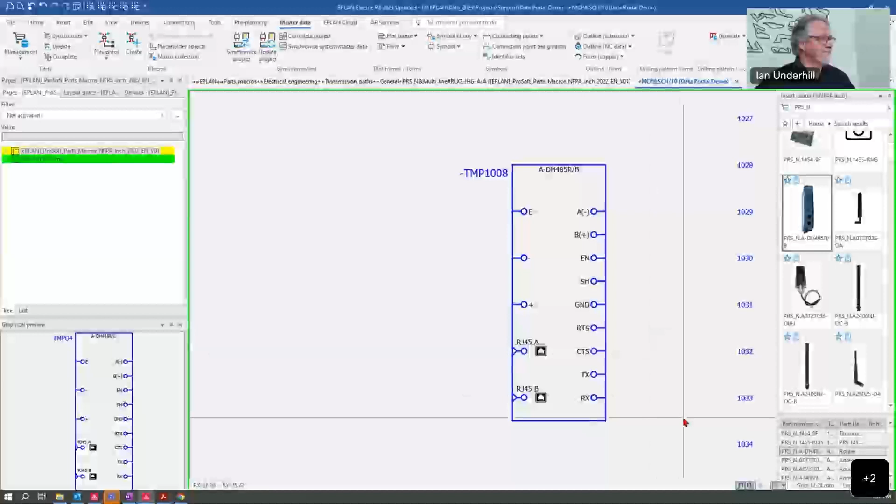For example, here's a 485 converter, so probably 485 to Ethernet, I would imagine - a router. Here's an example of the macro that comes with it. So you've got some power connections, plus and minus, and then the 485 connections. Those still familiar with using RS485 or 232 will recognize the names of the receive and transmit connections, and then the output, which I would imagine is to Ethernet. So that's an example of the sort of macros you get.

If I try and remember what the name of this particular part is, I'm gonna copy it, because my brain's like a sieve and I'll never remember. So what you also get...

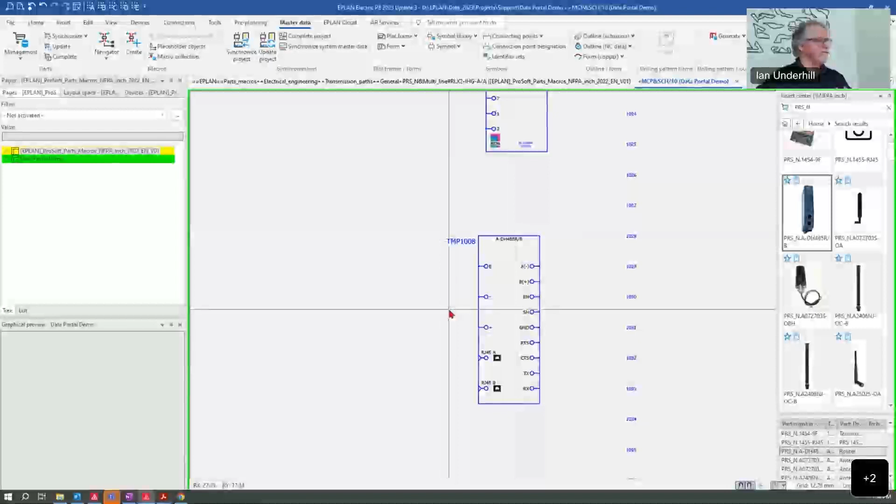...is the macro project that our engineers use to create these macros from. So that is the ZW1 file, this one here. The idea of giving you that is that you can take what we've got and maybe you don't like the way it looks, you don't like where the text is, you want the connections closer together or further apart, whatever it might be. You might want it to look different. So we give you the macro data. And obviously I've got to go and find that one, and I've already forgotten what the name of the part was.

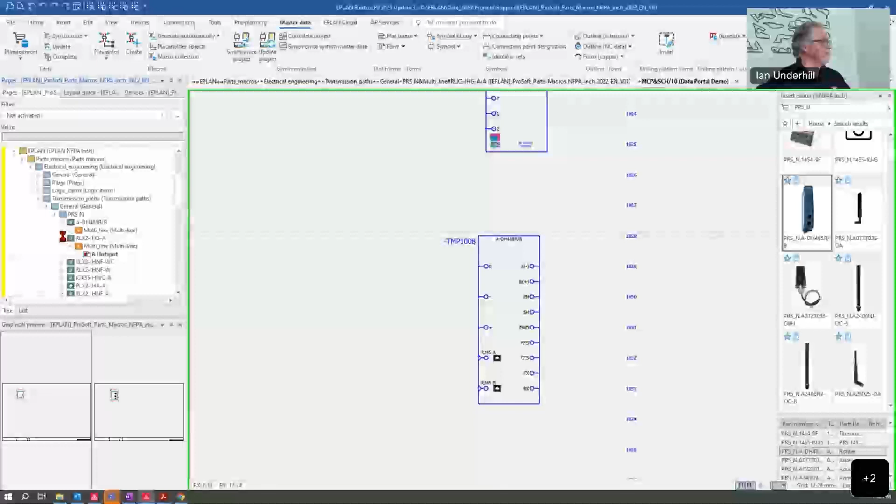ADH something. So, as you see, the way these are structured - oh, there it is, that one there - in the ZW1 file, the project that we give you, it uses EPLAN parts, macros would be one part of the function or one part of the structure. Then the plus plus structure, we've used that to identify the various categories within the EPLAN product group. So obviously in the EPLAN parts database, you've got electrical engineering, then transmission paths, and under transmission paths, general - that's where the structure comes from. Then the manufacturer's name, we've used the plus structure to manufacturer's name, and we just use the code here. And finally, we've used the user structure for the part number.

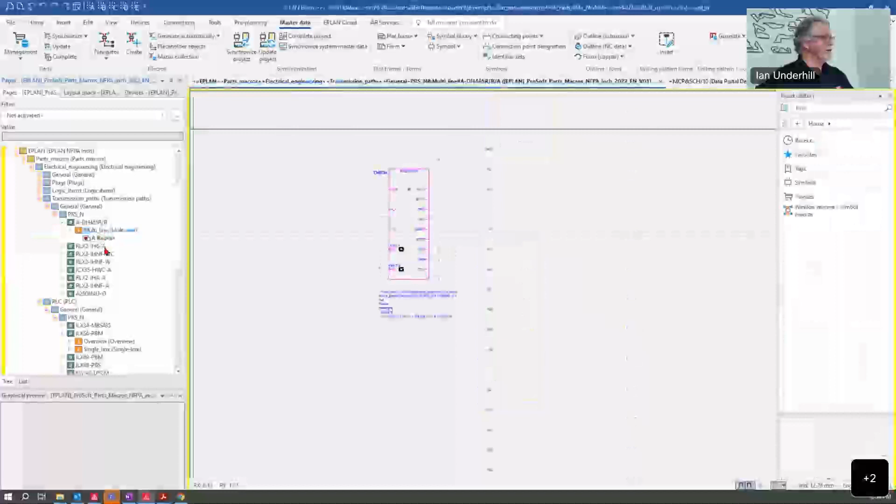So for this part number, we can see it's just got one macro. It's a multi-line macro, and it's the router. Let's have a quick look at that. And there we see that's where that macro was created from.

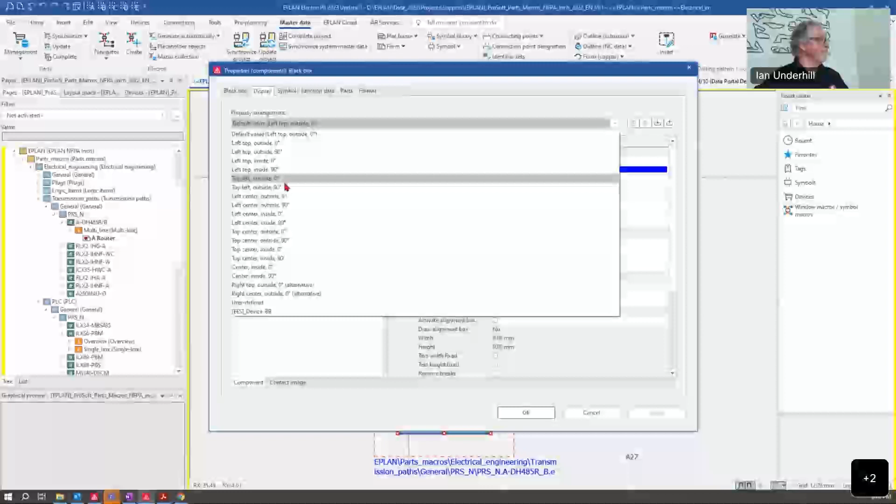So if you decided you want to modify it to make it look different, you've got the ability to modify it from here. So maybe if you wanted the text to be on the top, for example, say I want it on the top center outside, top center. So I want that to be the default, so I make it simple. Then I can save this macro, master data, generate automatically.

Let's put it in the right place. Obviously I do need to do an update - let's get rid of that one. Okay, and then I could bring it back in and find it.

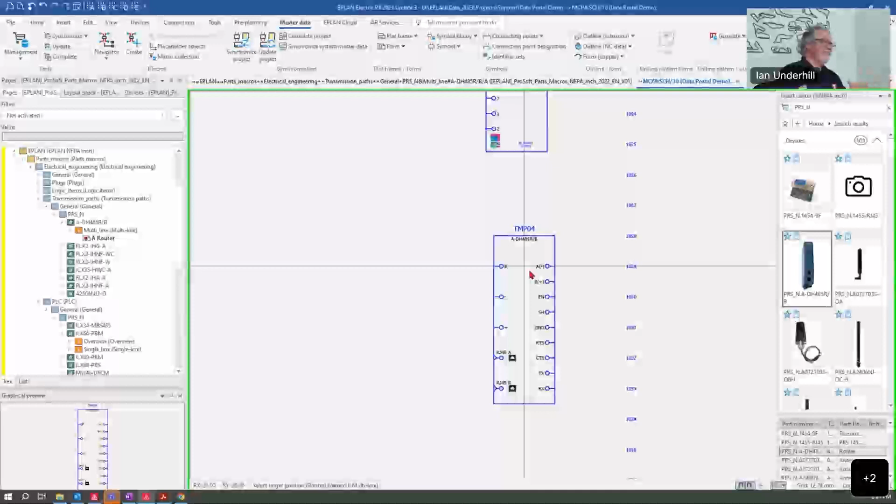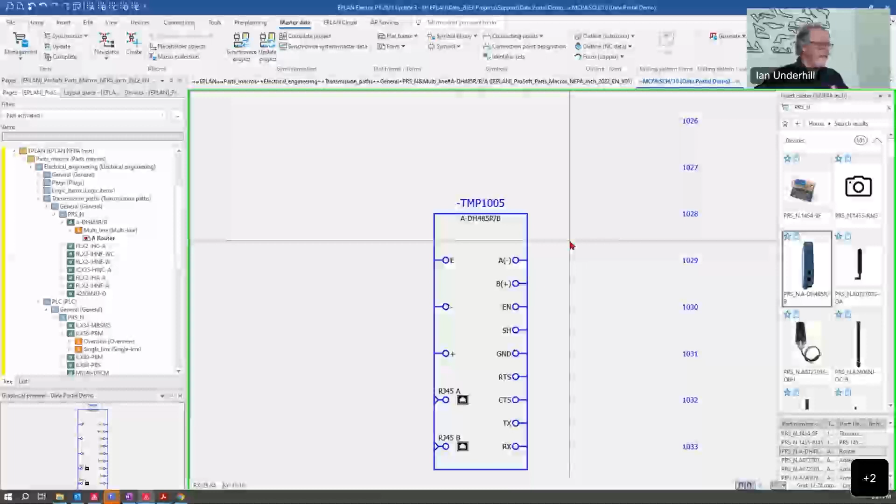As you see now, the text comes by default the way I would like it, so you can use that. Ignore the fact it was magenta in the macro project and it's blue here - the reason that's just down to the setup in my particular project that uses blue for that particular layer rather than magenta for the layer here in the macro project. That's the only reason that's different.

Well, thank you, Ian. Josh, the ultimate goal of the master data team or data portal team is to never have a customer come in and need a part and it not be there. It's a work in progress - if we were there today, I wouldn't have a job. But that is the goal.

If we can, the more parts we can get in - you don't have to have every single part on the planet in there, but every part that a customer is going to use, we'd love to have in the data portal. We're working towards that.

This is kind of a stopgap measure to help us get more data in, and Ian talked about it too. Our distributors - we asked them for lists of parts that they sell. We base this on quantities sold in the last year by those distributors to decide what to start pulling in.

So we're adding data. We've got 10 manufacturers on there today. In another month, we'll have another 10 or 15 added. We're going to continue to add data, and ultimately the goal is to migrate that data over to the data portal itself, because that is the standard repository for the data. This is, as I say, kind of a stopgap measure to get us there and get more data in.

And these manufacturers don't stop making parts. That's the whole purpose - that you have parts being manufactured all the time that you need data for. So you're keeping up with not only the ones that we don't have, but those that are just coming out. Correct, yes.

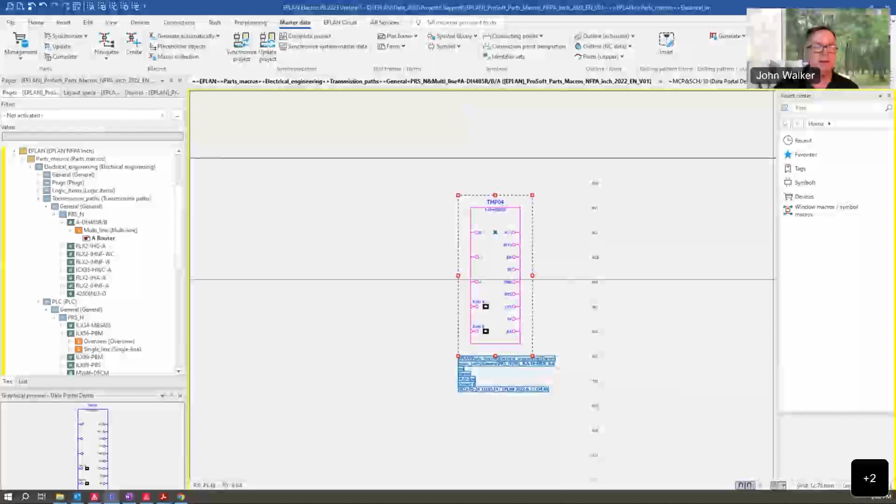I'm working with existing vendors, and my counterparts around the world are too, to add new parts as they come on board. So as they develop a new part, some vendors, we create the data for them, and some vendors create it themselves. It just depends - Allen Bradley has a team that creates their own data and uploads it.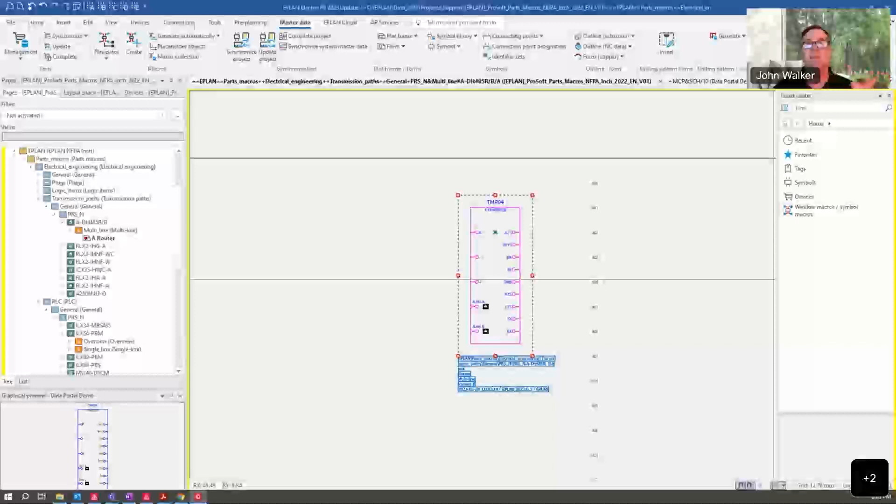One other thing, Ian - if you don't find the part in the data portal and you don't find it in the sample data, what can you do?

Okay, so unfortunately my camera's decided to die. Got fed up of looking at me, like probably you guys. So, saved you the trouble.

And this part is really important, John, for a couple of reasons. So one thing I am going to look at is not just - you go to the data portal. It's been a long time since I've done this, but I remember where to go find it. Maybe it gave up because I've got internet connection issues. Oh, there we go, okay.

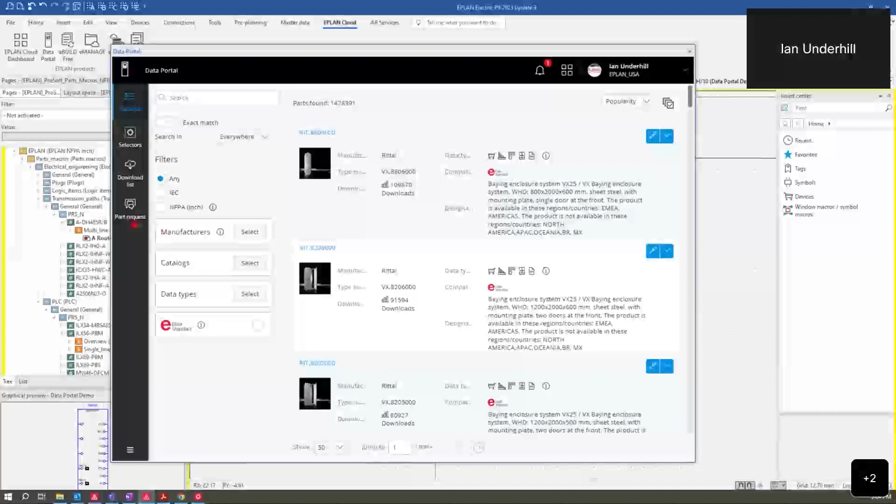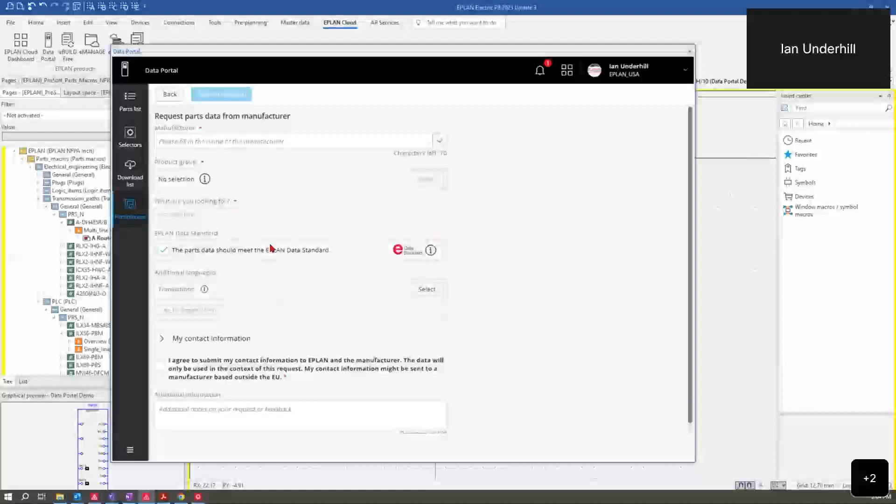So we've got a part request here. If you've got a particular part that is not on the data portal, for a manufacturer that already has parts on the data portal, then you can go and request from that manufacturer. So you pick, obviously, from the list of manufacturers - for example, Rockwell is going to be there somewhere. I assume it would be under R for Rockwell.

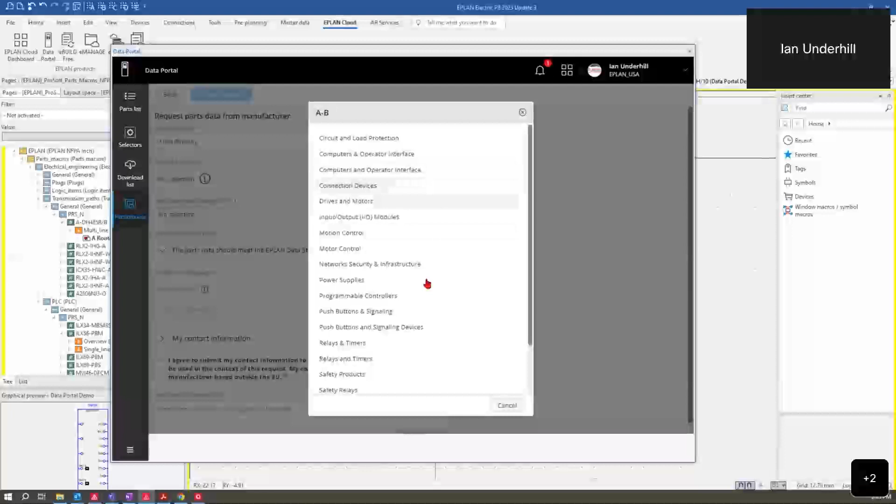Maybe I'm wrong - no, it must be Allen Bradley then. I think it's under Allen Bradley. Oh, there. A-B, yeah. So you select what type of device it is - it's a PLC type device.

Whether it's a specific part or a range of parts. So, for example, the product range for Rockwell - maybe you want the new Flex IO 5000, so you might pick a range, or it's an individual part that's part of an existing range, just a specific part.

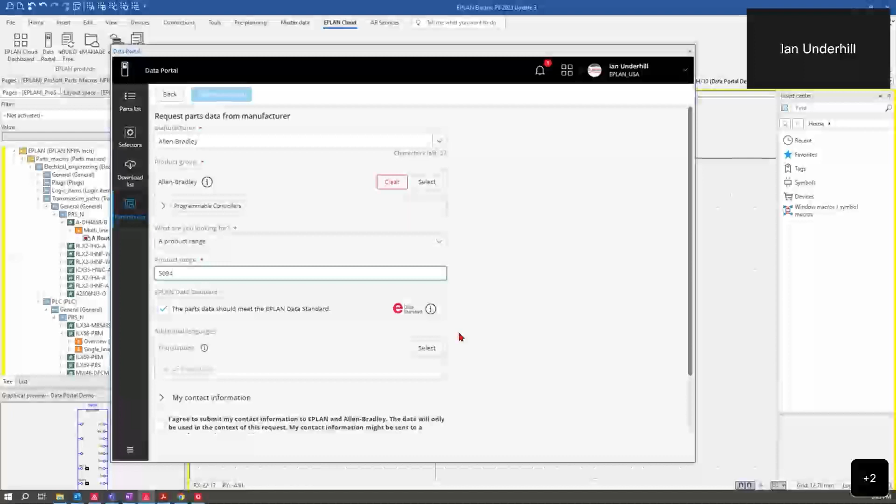And then you go through and you request it, and that goes through EPLAN onto the team - in this case, the team at Rockwell. Right, it's important to do that.

So that's just when you go into the data portal - that is one of the icons over on the left, the part request. You can't find the part - if you searched the way Ian showed, searching by manufacturer, searching by part number, and you can't find it, you can go to that parts request and request that of the manufacturer. And then that's super simple.

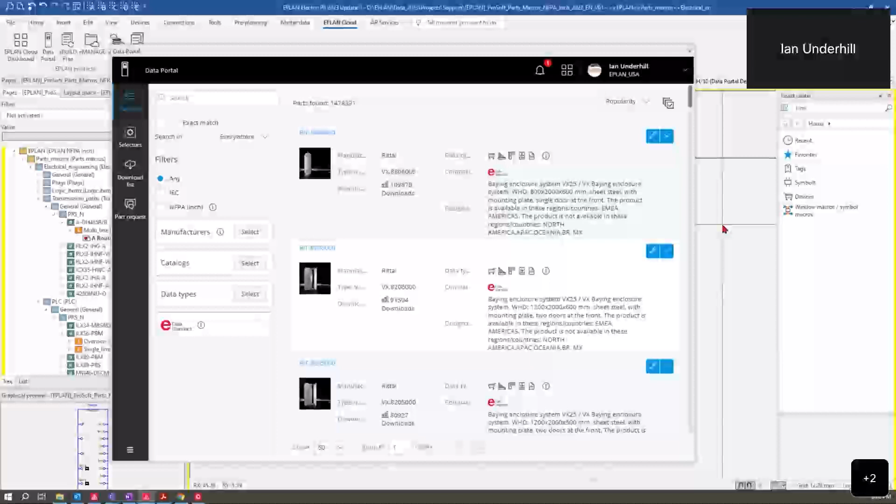Absolutely. The one other thing I would point out - that's one way of effectively giving the manufacturers, the Rockwells and Siemens of this world, some feedback on what it is that you're using. I would also encourage people to give feedback on parts that are there if they find any errors in the data. Yes, that's really important, and you can do that by picking a particular part.

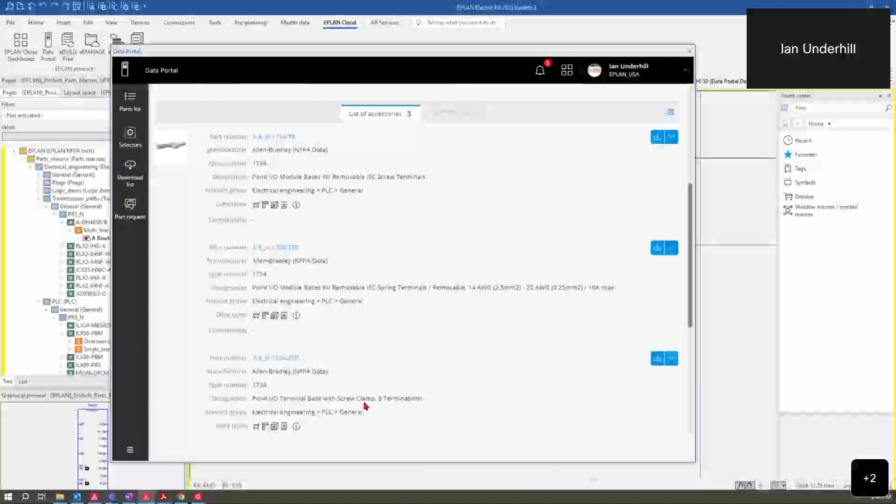I'm picking on Rockwell because I know the parts very well, not particularly for any other reason. But if I pick a particular Rockwell part, if I download the data and I find there was an accessory missing, or the information about the part was incorrect, I can select here and add feedback. It's a very similar form, other than the fact it fills some of the information already because it picks the part.

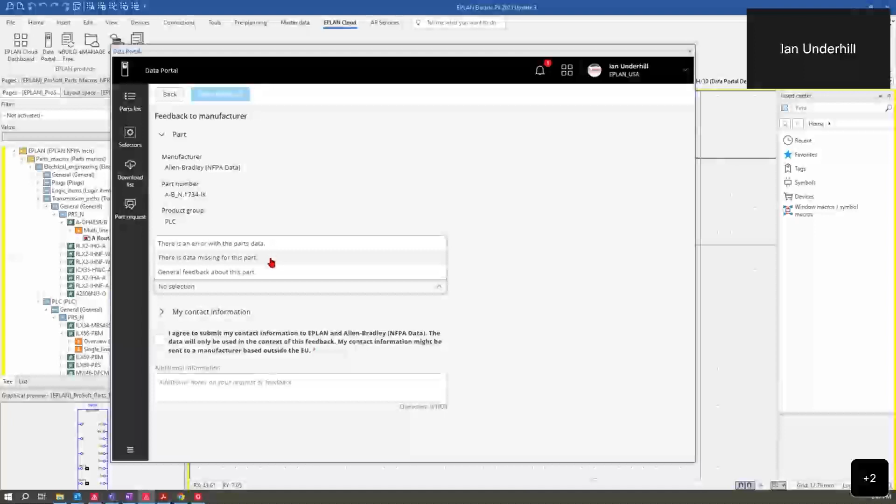And you can give feedback on what type of error it is - there's data missing, was the data wrong, or is it just general feedback? So I would encourage people to do that.

Obviously, some manufacturers are more responsive than others. I'll give you a good example. I was working with a customer in the Detroit area, and they had cables from the LAPP cable company, and the data was incorrect. It was a 24-core cable, and in that 24-core cable, there were 23 blue cores, one blue and white core, and one green and yellow core, typical 24-volt control cable.

In the data, it labeled the blue cores 1 through 23. Core 24 was the blue and white one, and you don't have a core number for the ground, the green and yellow. Well, that's incorrect. Core 1 and core 3 through 24 are the blue ones. So we did this,

reported an error with the data, and that was at sort of 4 or 5 o'clock in the afternoon before we left. We instantly got an email back from EPLAN saying, yeah, we've received the information, we're going to pass it on to LAPP cables.

By the time I got back in the morning and logged on, I had three emails from a gentleman at LAPP cable in Germany. The first one said, thanks for the information, we're taking a look. The second one said, oh yeah, you're quite right, the data's wrong, and a couple of other cables have got the wrong data too. It's an error in our spreadsheet. And then the third one was, we've updated the data, we've sent it to EPLAN, and it will be available at the next upload. So some of the manufacturers are very, very responsive.

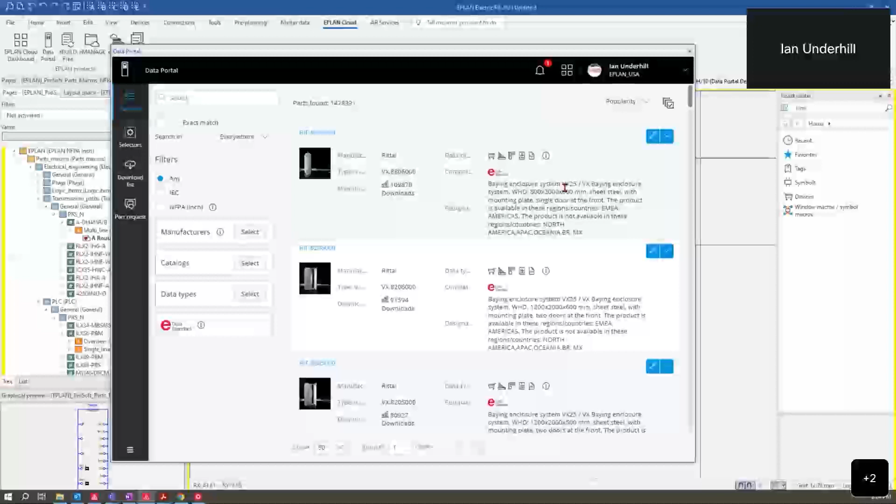Or me, yeah. We like to know this. The easiest is your account manager, they'll get with me. But if you, and maybe Josh, you can put our contact information in there at the end. Sure, just don't contact me because I have no idea. Yeah, you're wasting your time. Well, I'm going to pass the information on too, Josh.

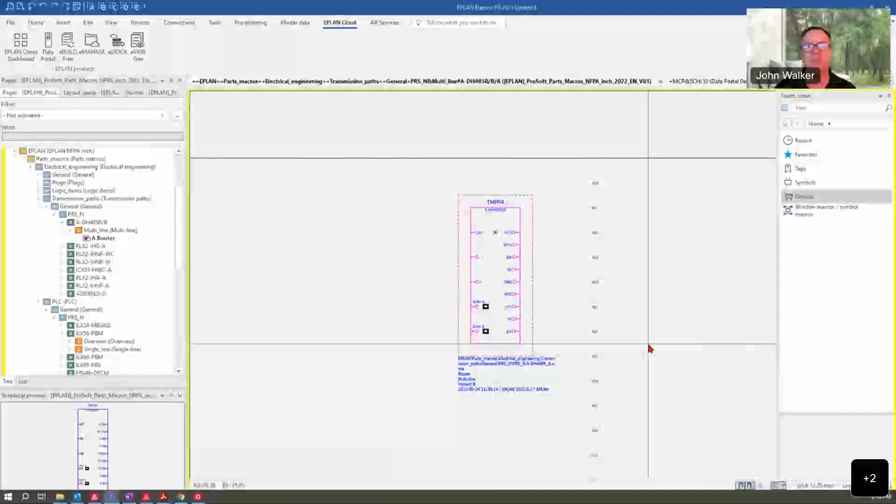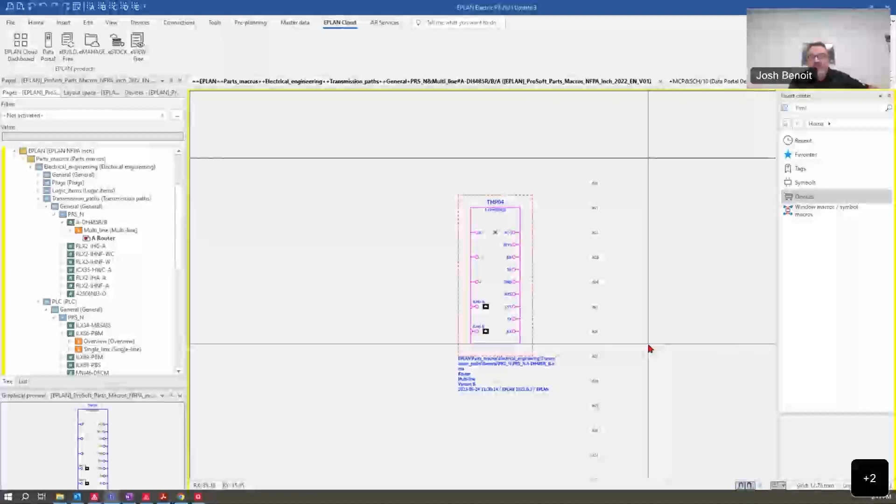Excellent. Josh, I think that's all we've got today. Man, that's so much information, but it's great because it's very comprehensive about the data portal, how to use it, how to find information, what information you get, and it's actually more than I could have wished for from this Open Line Friday. So, John, I thank you so much. In 6 months, you've learned a lot more than I have about EPLAN. I've got a lot more to learn.